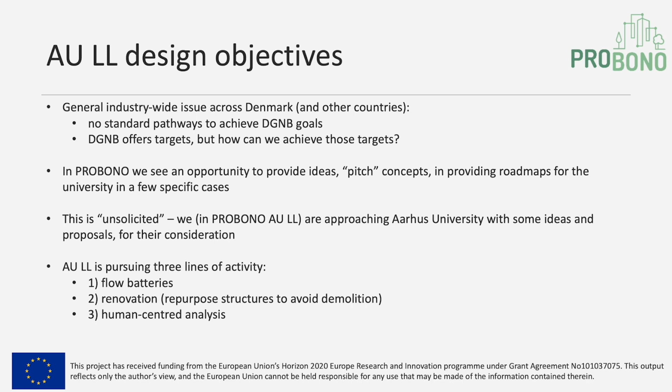We are currently pursuing 3 lines of activities: flow batteries, renovation and repurposing certain structures to avoid demolition, and human-centered analysis. There are 2 sites that we target, University City and Campus Viborg. Just keep those in mind for the moment.

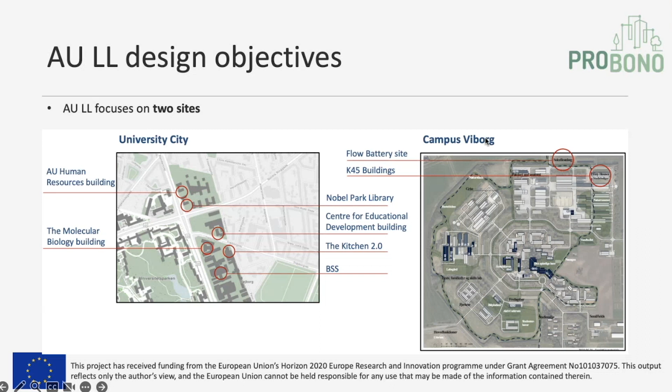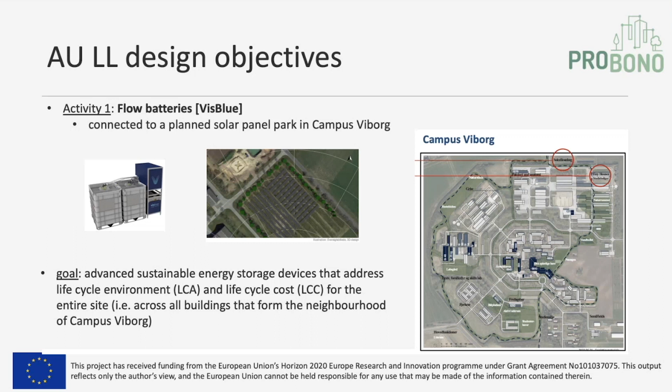The first activity I mentioned is flow batteries. This is with partner VisBlue. The idea is that we're connecting flow batteries to a planned solar panel park that's going to be installed in Campus Viborg. The goal is advanced sustainable energy storage devices to address life cycle, environment, and life cycle cost aspects for the entire site. We can see how that aligns with this environmental perspective.

In summary, I'll go into more detail in a moment, but to be quick: it's replacing lithium batteries with flow batteries. That was Aarhus University's original plan. Advantages are demonstrated through LCC and LCA, or at least predicted through these two, and will hopefully be demonstrated once the flow batteries are installed and we're monitoring them.

VisBlue conducted some extensive predictive life cycle analysis, and this was key to getting this all to work. We've got confirmation from the client side now, they're really keen on these flow batteries, to the point where they've invested 2.5 times more than what PROBONO is offering in terms of budget.

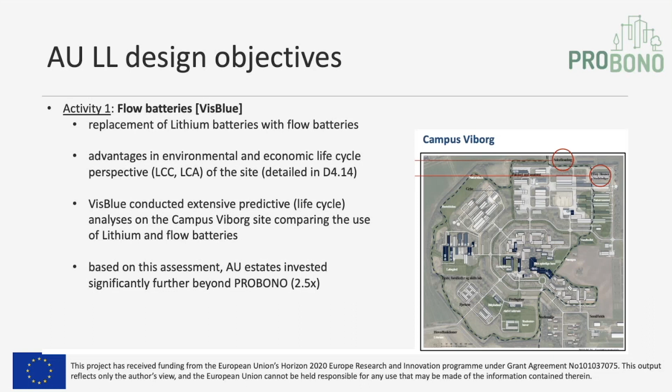That's great. The second activity is repurposing existing buildings, again on Campus Viborg, and this is mainly led by COWI. The goal here is upcycling design strategies to repurpose existing structures specifically for new housing. We've got one target case at the moment, referred to as K45.

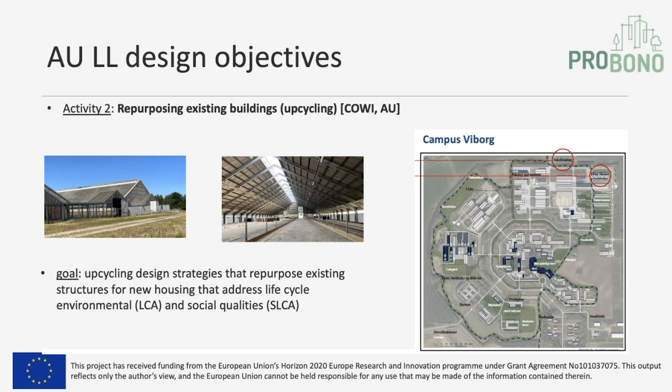That's the photos you see. Used to be a cattle shed, I understand. We're looking into keeping them rather than knocking them down and repurposing them for housing—housing for like 50 people.

The drama in this scenario, the sort of interest in it, is that the municipality, Viborg Kommune, has very strict regulations for accommodation, and so they would rather knock everything down and build new, just to ensure that all the regulations for housing and accommodation are met.

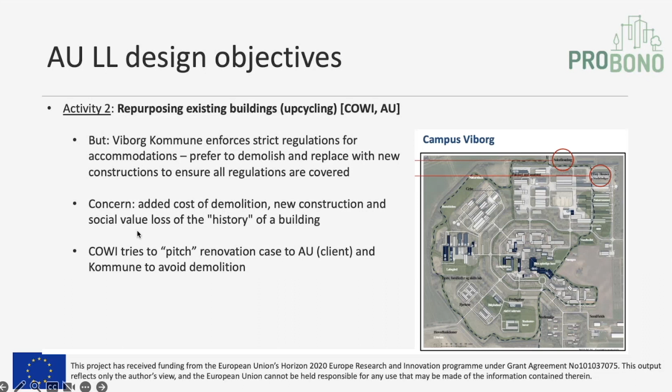So we're trying to make a pitch to them to convince them that a more modern way of thinking from a life cycle perspective is to avoid demolition, and that we can get good accommodation with repurposing. There are all sorts of other benefits, not only environmental, but also social value. If you knock the buildings down, we lose some history.

Finally, the third activity the Living Lab is running is this human-centered analysis. This is with Aarhus University, ITA Innova, and also System X. I should mention, should have put them there too.

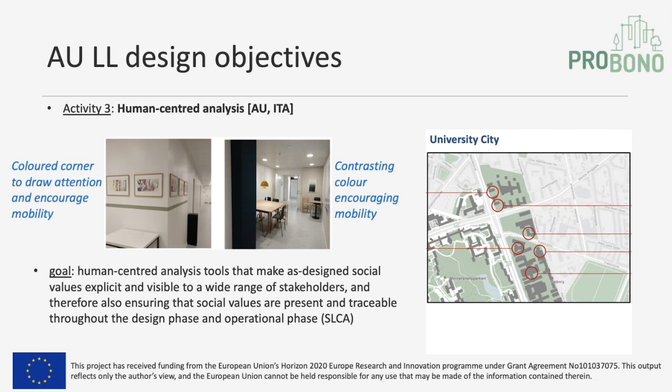Good. Yeah, the major challenges here are that DGNB talks a lot about social values and social qualities, but as a concept it's very underdeveloped. Social values are qualitative in nature. They're not so easy to measure or assess like we do with cost or energy consumption.

And they tend to refer to the subjective experience of occupants. So there's a kind of ontological question, in the sense of philosophy, of what exactly we're talking about when we say it encourages mobility. The point is that this way of thinking is not so well developed in theory and in practice, and that's what we're focusing on there.

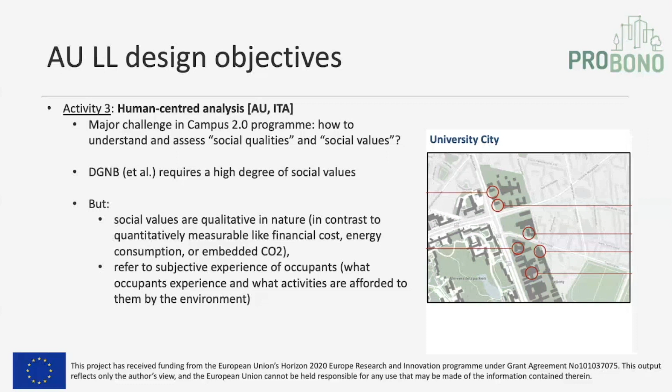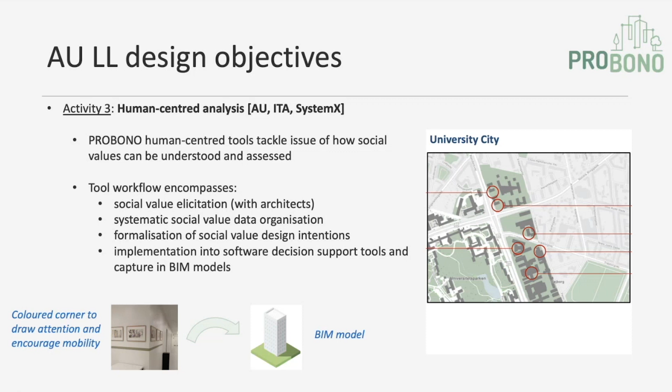To summarize, we want to take these as-designed social values and ensure that they're captured explicitly in the digital representation of the building. That's the goal. To get there, there are a lot of steps along the way. So to summarize, we've got 3 activities: flow batteries, repurposing structures, and human-centered analysis.